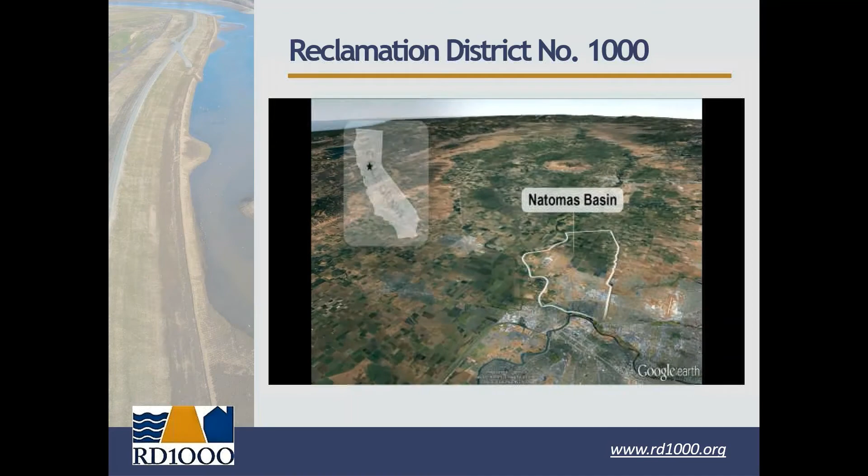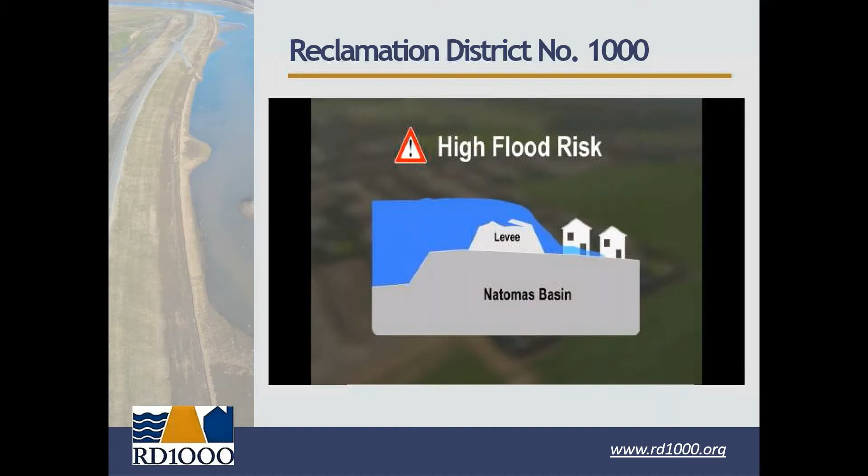This is the Natomas Basin in Northern California. Looks like any other neighborhood, right? Except Natomas and the Sacramento region are some of the most at-risk regions in the nation for catastrophic flooding. Local, state, and federal agencies are undertaking more than $1 billion in construction to upgrade the 42 miles of levees that surround the area and help hold back floodwaters.

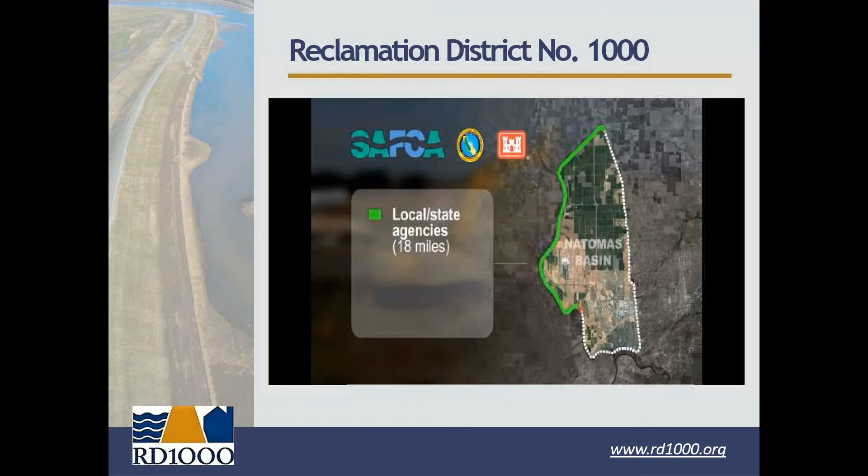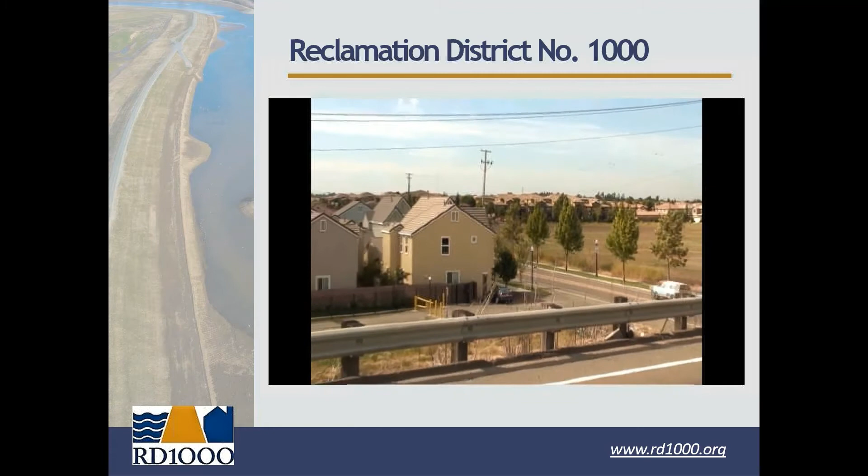The Sacramento Area Flood Control Agency and the Central Valley Flood Protection Board have completed improvements to 18 miles of levees, and over the next several years, the Corps of Engineers will work on completing the remaining 24 miles. Why invest so much in just one region? Because flooding in the Natomas Basin has devastating impacts beyond California.

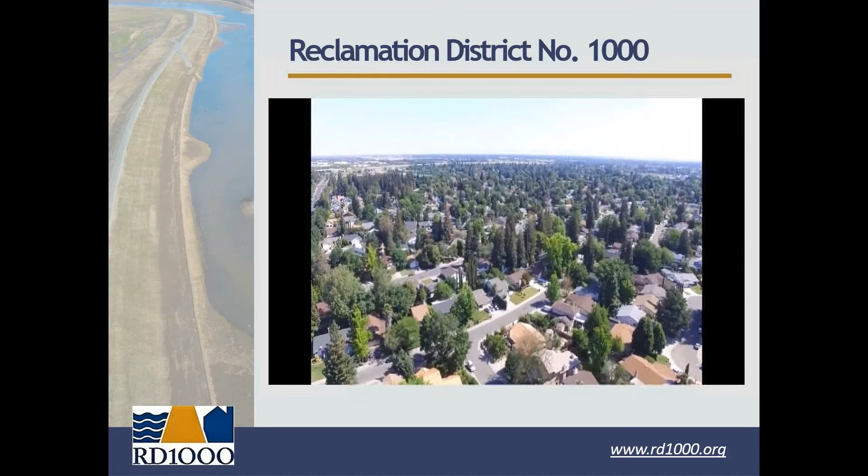The Natomas Basin is home to more than 100,000 people, the Sacramento International Airport, and California's two largest national highways pass through the heart of the region. The loss of life and property caused from catastrophic flooding would be immense, causing significant disruption throughout Sacramento and heavily impacting local, state, and federal emergency resources.

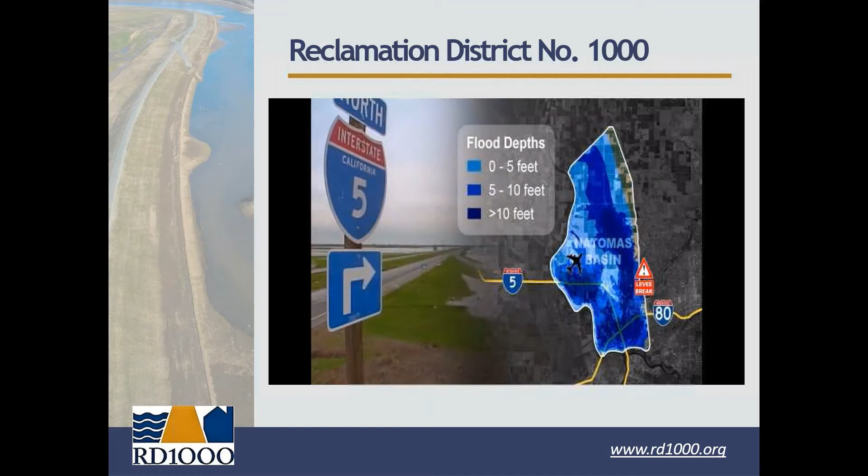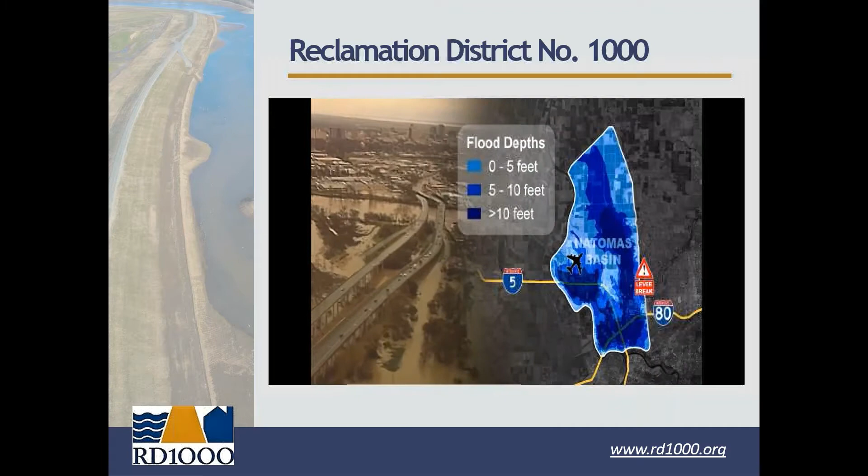Additionally, if the transportation corridors were shut down due to flooding, people throughout the U.S. could easily see shortages and increased prices on food and other commodities coming from California. The impacts to people and property are just one part of the risk, though. The probability of disaster in the region is also high.

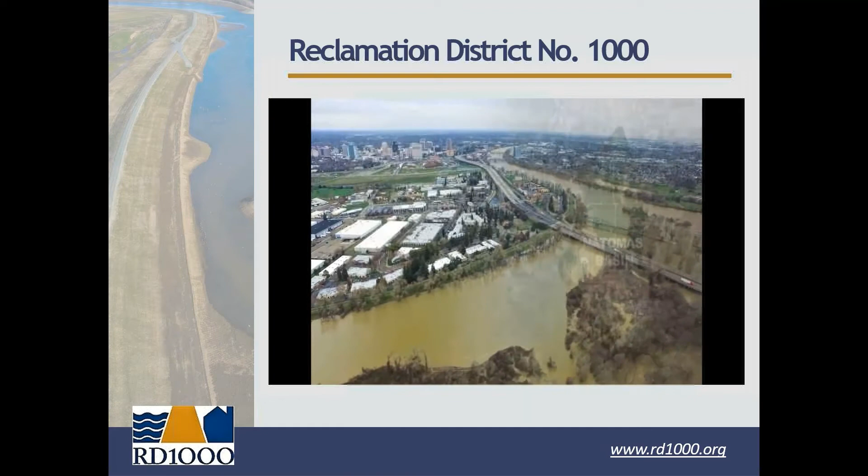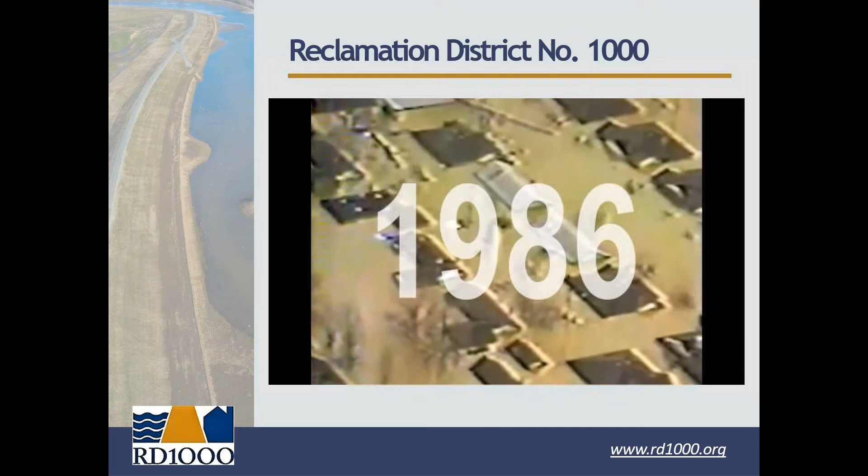The Natomas Basin lies in one of the lowest areas in the region, next to several waterways and two powerful rivers, the Sacramento and American Rivers. The region has a historical tendency to naturally flood, and when the water is high, like it was in 1986, 1997, and 2017, the only thing holding back floodwaters are the 42 miles of man-made levees.

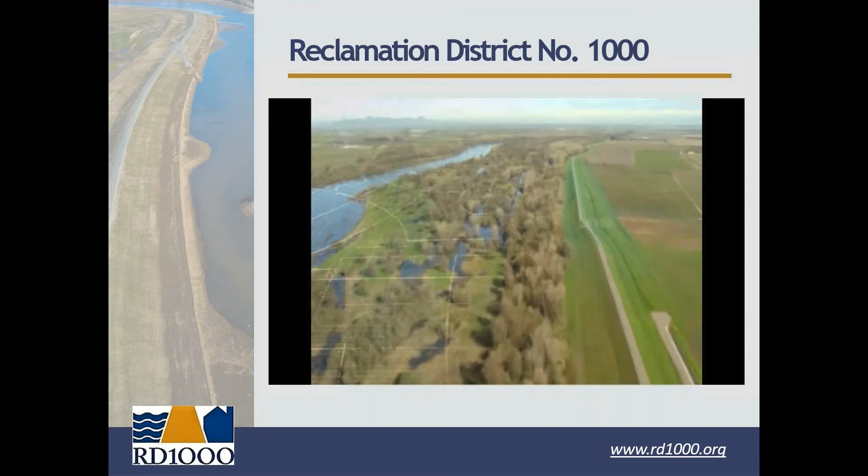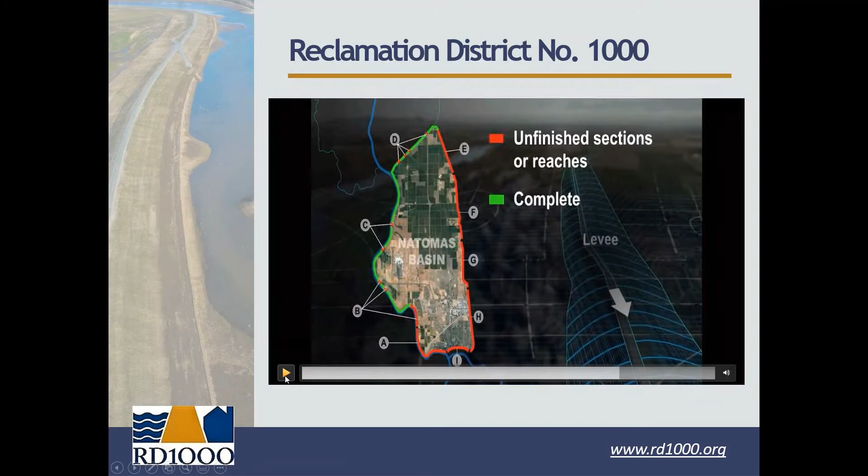The Army Corps of Engineers improvements to these levees will consist of several phases of work across 9 sections or reaches. Construction is expected to take about 8 years. So that video was produced in 2017, and the Corps obviously has started a lot of work since that time.

So to give you an update to where we are 4 years later, we'll just walk through these sections here and kind of start at the southern boundary of the district along Garden Highway and the Highway 99 interchange with reaches A and B. Reach A, the Corps has started with demolition of structures and tree removal.

They're supposed to finish their final construction plans and go out to bid later this spring and summer, with contract award scheduled for September of 2021. And that work would then begin in the spring of 2022, which has a cutoff wall and adjacent levee in certain portions of Reach A.

Reach B continues construction and relocation of the Riverside Canal for the Natomas Mutual Water Company and their levee construction south of Powerline Road. RD1000 has a portion of this work being done for them as well, and that's the replacement of Pumping Plant 3. That actually started today on April 15th while I'm recording this presentation. They have started that and will be complete by November 1.

Probably the biggest impact for the community on this particular part of the work is that Garden Highway will be shut down between Del Paso and San Juan Road between April 15th and November 1.

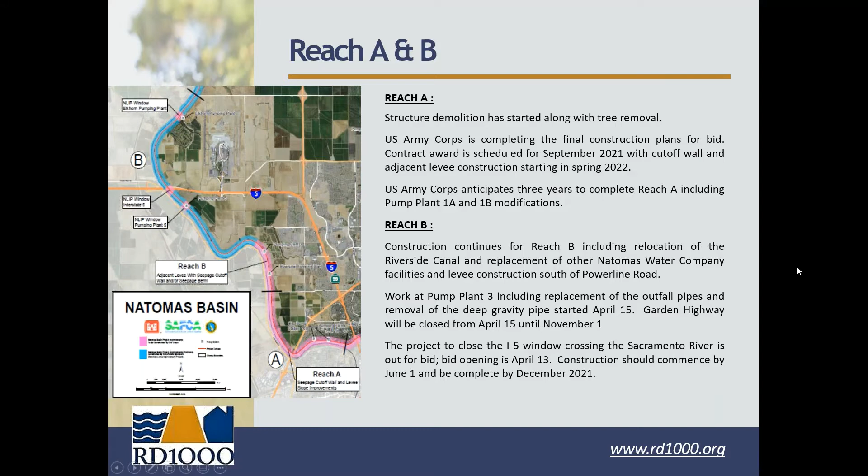And as we go through these slides here, I know there's a lot of information on them, and I don't expect that you'll be able to see it very well, but that's why I'll read through these. Moving on to Reach C and Reach D. Reach C project is complete, and the district is providing all the ongoing operations and maintenance of that section.

Reach D, there's a little bit of remaining work. Most of it was complete last fall, but our pumping plant number 4 needs to be relocated. That was just recently awarded to Syblon Reid, and they were given a notice to proceed on construction, which should begin in the next week or two.

And once that's complete, the Corps, concurrently with that work, is working on the project turnover. So once pumping plant 4 is complete, we should be able to take receipt of all the improvements back from the Corps, and then it's up to RD1000 to continue the operations and maintenance of that moving forward.

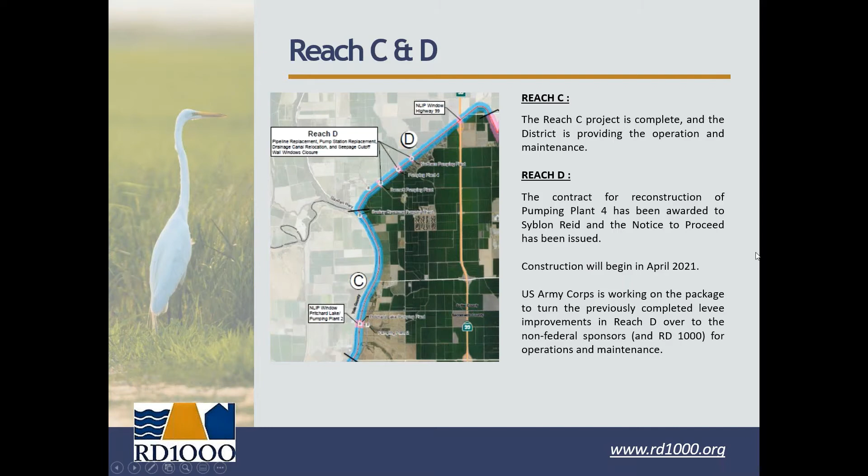Reach E, largely along the eastern boundary of the district along the Natomas East Main Drain. The Corps is working on 95% plans, which are due in July of this year. And the current schedule is to award the contract in July of 2022, with construction beginning in 2023 and 2024. Although our team with SAFCA, DWR, and RD1000, we're looking to expedite the schedule to be complete in 2023.

Reach F and G are on a similar time frame. They have produced to the district 35% plans, which we reviewed and provided comments back in March of this year. Starting in April, the Corps is conducting value engineering to help with identifying areas for improvement to either reduce cost or make construction easier or reduce impacts and right-of-way acquisition.

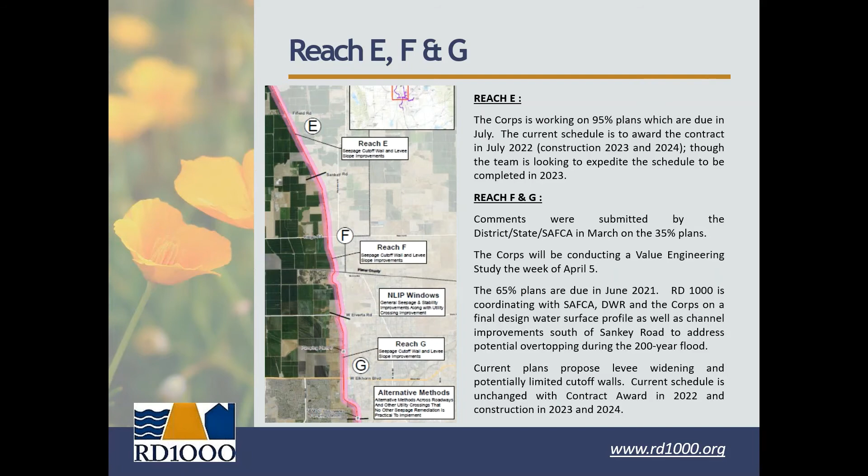And so that's going to be going on probably for about 60 days and be wrapped up by June 1st. After that, we anticipate that 65% plans will be provided to the locals for review and comment to address some of those issues that we have, particularly along Sankey Road. And its current schedule is for contract award in 2022, with construction beginning in 2023 and 2024.

Reach H and I, the final portions here, as we loop back around the basin, back to our starting point of Reach A. Reach H is in its 3rd year of construction. It's largely complete with all of the major levee improvements. However, there still is some patrol road construction that needs to occur, and fencing and reinstallation of the city or county's bike path along the levee crown.

Reach I, construction of the cutoff wall has been complete along Garden Highway, and project finalization to turn it over to SAFCA and the district is in progress. The design for Reach I Contract 2 to construct the patrol road and maintenance road and some levee slope flattening has been awarded to HDR engineers, and the Corps is currently working with SAFCA and others on the necessary right-of-way acquisitions to complete that work.

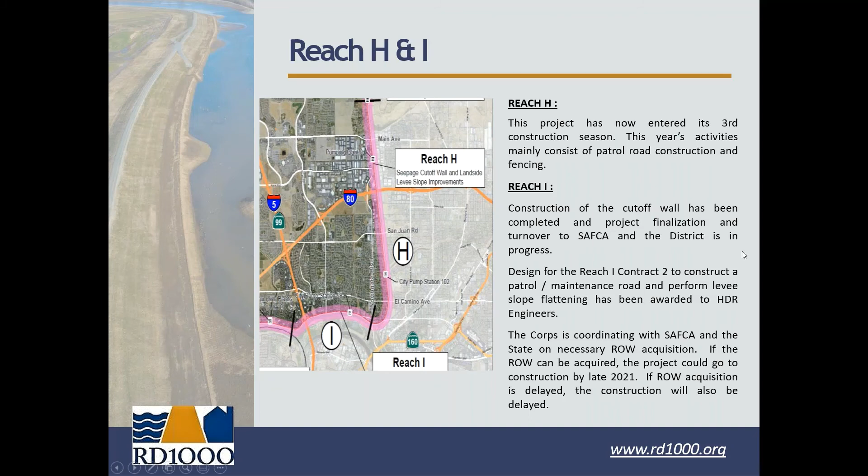So if the right-of-ways can be acquired, the project could go to construction by late 2021. If not, then that project would be delayed. So that's our update since the 2017 video.